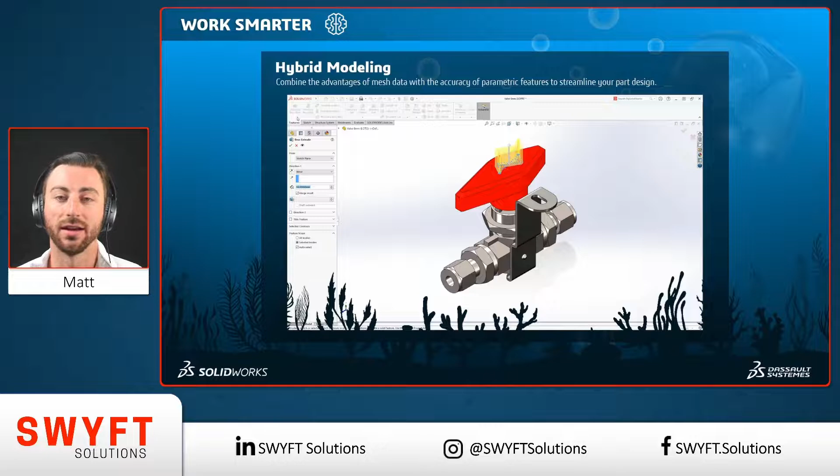Then we're going to jump into some of the newer applications available via the 3DEXPERIENCE Works portfolio that can work directly with SOLIDWORKS to enhance your workflow even further. So let's get started with the on-the-surface look and start with some of the improvements that will help you work smarter. First up, we've got improvements to the hybrid modeling process, allowing you to work with mesh data like you've never had before. Now you're able to actually just use parametric features directly with your mesh data, such as cut extrude, boss extrude, so on and so forth, rather than having to use those Boolean operations.

Next up, we have configuration table, where you're actually able to have a table and see all of the features of your configurations and edit those all at once by suppressing or allowing certain components to be available in those assembly configurations. Next up, we have component patterns, and with component patterns, there's been improved intelligence when it comes to using pattern-driven component patterns, and the seed position will be a lot more accurate.

And we have a complete rehaul to the interface of the GD&T callouts when you're creating your SOLIDWORKS drawings. So you're going to have a much smoother workflow if you're adding GD&T callouts.

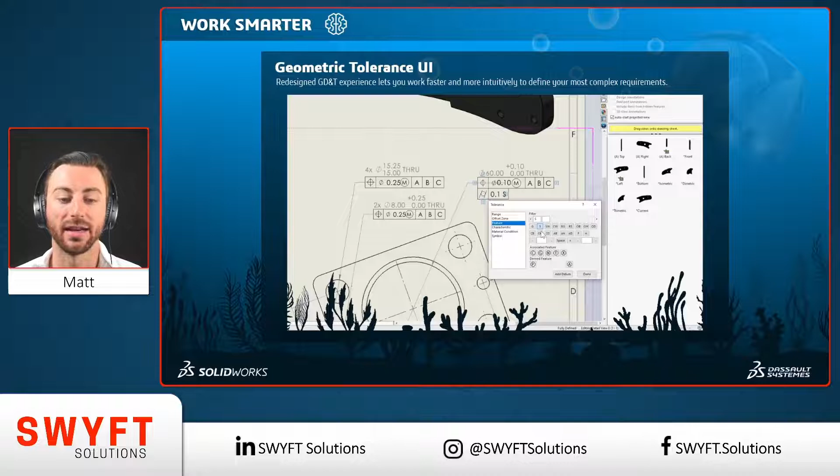We have a completely new stud wizard added in SOLIDWORKS 2022. And with this, you're able to generate external threads to existing geometry. So if you have a boss there, you can add external threads to that geometry, or you can choose a specific point, choose the size of the stud, and it will actually add the boss and the external threads for you. You can add undercuts, and the graphics for the cosmetic threads have been improved. So you're going to have a better looking model while keeping that lightweight performance.

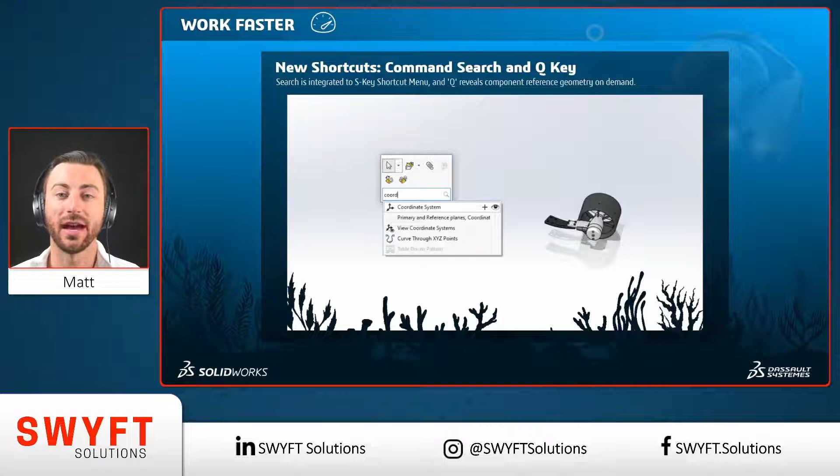Now let's take a look at some of the improvements that will help you work faster. There are some new shortcut commands added in. With your S key, you now have the command search right in there, and that's going to be awesome for so many people. The S key is definitely a fan favorite. And then with the Q key, that's going to allow you to hide and show your reference geometry, such as any reference planes, so on and so forth.

If you've worked with large assemblies and large drawings, you know if everything is always resolved all the time, it can really bog you down. So there's been a lot of improvements over the past few years with large design review mode for large assemblies and detailing mode for drawings with large assemblies or parts. So with this, you can actually go to detailing mode drawing directly from large design review mode without ever having to resolve any of your components, keeping your workflow really nice and quick.

With the similar concept here with the sub-assemblies, you can now directly open up sub-assemblies in large design review mode from the parent assembly that is in large design review mode. Same with a lightweight concept, so you're able to really keep that workflow moving really nice and quickly without having to resolve those components.

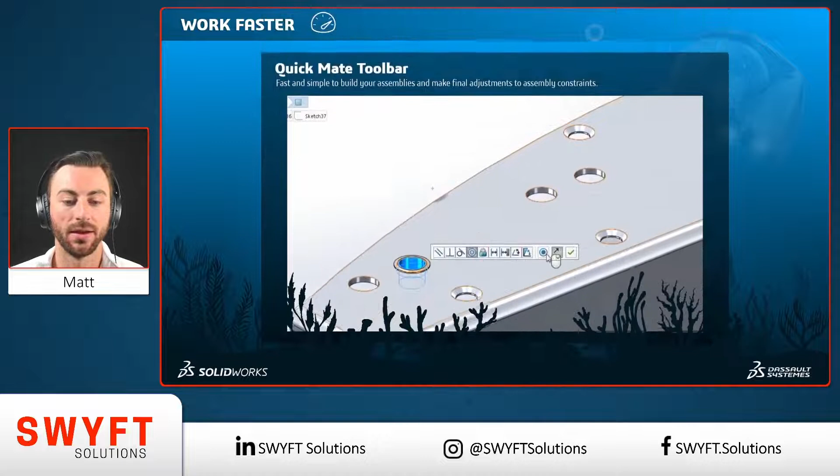The quick mate toolbar has a little bit of a tweak here in which you can actually fine-tune your mates before you confirm the mate. So for concentric mates, you can lock that mate before you confirm it. So on and so forth, and that can be toggled a little bit in your system options on how you want that to function.

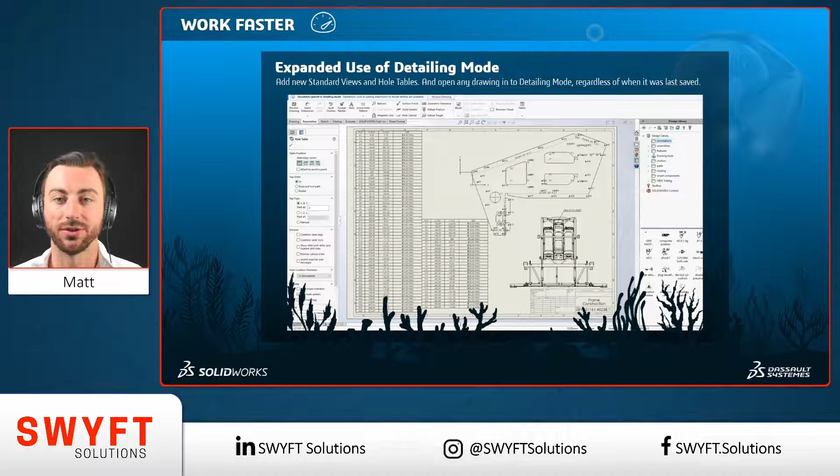The detailing mode has some improvements in which you can now add hole tables without having to resolve any of your components, and even better, you can add some standard views. So you can just go ahead and add your front, side, and top views without ever having to resolve those components and make your workflow much smoother.

And now let's take a look at how SOLIDWORKS 2022 can help you work together. So there's now new options for administrative image types, and this will help you deploy those images remotely more smoothly and allow people to download the installation data directly from SOLIDWORKS rather than having to VPN into your connection and pull it over remotely.

With the 3DEXPERIENCE Works portfolio, if you haven't heard of xShape, that allows you to use cloud-based, in your browser, basically a sculptor type, subdivisional type modeling. It will really enhance your workflow if you work with industrial design type designs, anything with more complex surface geometry.

There is now available out-of-the-box cloud data management powered by ENOVIA tools, and it'll get you up and running with cloud-based data management. So wherever you are, you can be managing your data, and we'll be taking a look at some of these tools in more depth with the workflow towards the end here.

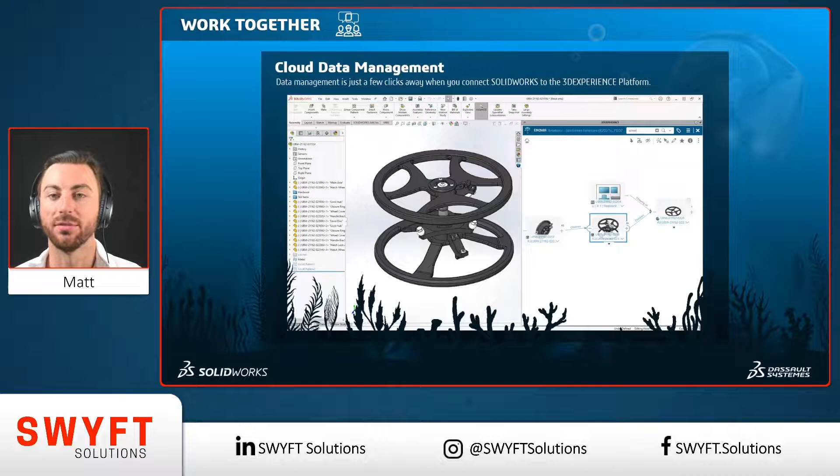We also have introduced compatibility of Simulia-based simulation, which will take you past the capabilities of SOLIDWORKS simulation. So if you're ever hitting any limits with SOLIDWORKS simulation, you now have options to go beyond that.

And there's a new licensing option with SOLIDWORKS, 3DEXPERIENCE SOLIDWORKS, that is directly compatible with that cloud-based data management that I just mentioned, and it comes with out-of-the-box platform connectivity, so you're able to get up and running with that data management without having to worry about setting anything up.

So now let's take a look at some of the features individually based on the different aspects of the SOLIDWORKS 2022 release. So like I mentioned, there's a lot more updates that have been made this year, but we stripped it down to some of the ones that we think would be more applicable to the wider audience. So we'll start out with the user experience. With the user experience, we talked about the command search in the shortcut bar.

With coordinate systems, you can now define their position numerically, and that can be an XYZ coordinate as well as the angle of that coordinate system. We talked about the reference geometry shortcut being now default to the Q key. With the system options, now you have a little information icon next to some of these options that allows you to hover over and get further context on what those settings actually do.

With dismissed messages, if you go into your system options and hover over that dismissed message, you'll now be able to see the full message rather than having just the first little snippet of it. With the notification and message bar style, I'll show you what this looks like here on the next slide, but there's been an update to the graphical appearance of that, so your user interface will be a little bit updated from what you're used to.

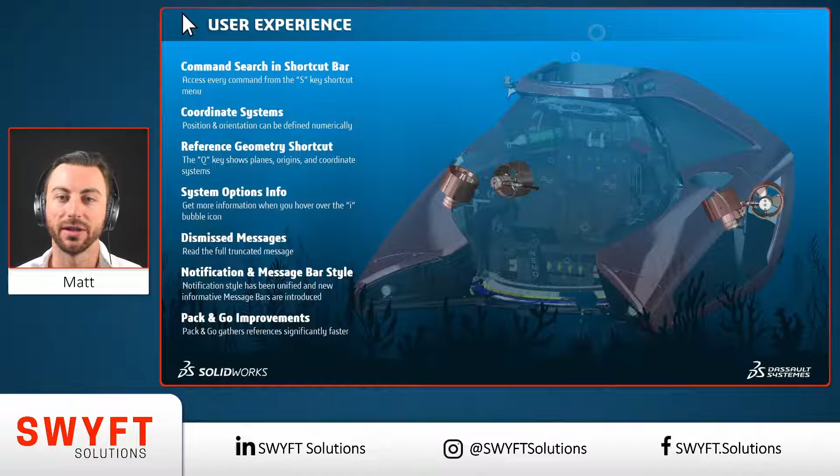So now let's jump into parts and break that into two sections. Start with hybrid modeling. So as we mentioned earlier, hybrid modeling now will allow you to use your parametric features directly with that mesh data. With the hole wizard, you now have the ability to define the size of that slot in the hole wizard dependent on the arc tangents or the arc centers. So that's going to be a really handy improvement.

You can now use bidirectional draft, so you can set that one neutral plane and draft in both directions rather than having to create two different draft features. Pack and go references: if you're using any kind of master modeling where you're breaking apart the different bodies at the end and saving those off as individual parts, pack and go will now recognize this and pull those bodies into the pack and go.

Section plane on an axis: if you've ever tried to section a model or assembly and just tried to guess where the middle of that hole was with your section plane, you don't have to worry about that anymore. You can actually choose the axis of that hole and you can now rotate the section plane about that axis. The stud wizard we talked about, and the configuration properties have now been updated, allowing you to go through and edit properties for multiple configurations a lot more easily.

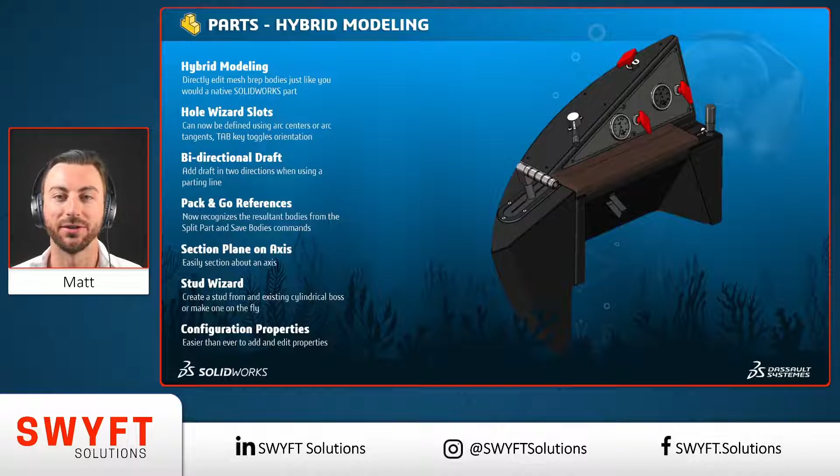So jumping into parts and structure systems, once you add your primary structures, you can now add secondary structures even more quickly. You can choose a single point and add multiple secondary members off of that point. With the connection elements, you can now add things such as brackets between two members. And what's even more cool about that is if it has holes, like a bracket with holes, the holes can automatically be added to the members that it's attaching. So it'll make your workflow really clean.

The gussets and end caps are now available for structure systems as opposed to just for weldments. You can also now mirror across two planes. So as opposed to having to do two different mirror features, you can now do that in one feature. And if you're ever adding any sheet metal flanges to circular edges, you can now directly edit that edge profile.

So jumping into assembly performance, we talked about remaining in large design review mode, and you can now open the detailing mode drawing directly from that large design review mode.

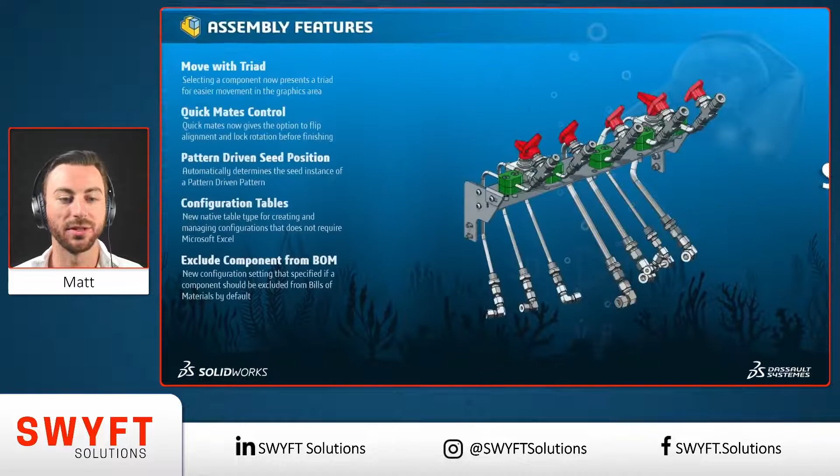Jumping into assembly features. With components in an assembly, sometimes if you're just trying to drag a component around in space, it's a little bit hard to get it accurately, approximately where you want. You can now drag those components with the triad, allowing you to move it in an X, Y, Z direction or rotate it about those planes.

Quick Mates control, we talked about the update to that Quick Mates toolbar. We talked about the pattern-driven seed position intelligence being improved. We talked about the configuration tables.

And now with the configuration settings, there's a new setting that allows you to automatically exclude that from a BOM. So if you have a configuration of a part that you automatically want to be excluded from the BOM, that is now in the configuration settings. Every assembly you now add it to, it will automatically be excluded, and then you can go in and turn it on if you want.

And then this is just there a little, as I mentioned earlier, there's a little bit of configuration you can do with that Quick Mate alignment setting, so you can choose how you want that to appear in your interface.

Jumping into the drawings. There's been a decent amount of drawing updates here. So with detailing mode, we talked about how you can add your standard views and hole tables, and you can open any year's drawings without having those reference parts. That'll allow you, if you have an orphan drawing, to open it up and see what's contained in the drawing without having those parts.

The circular dimension, if you're adding a circular dimension, you can now quickly toggle between whether you want it to be a radius, a diameter, a linear, within context, so on and so forth, and you can just use tab to choose it before you place it.

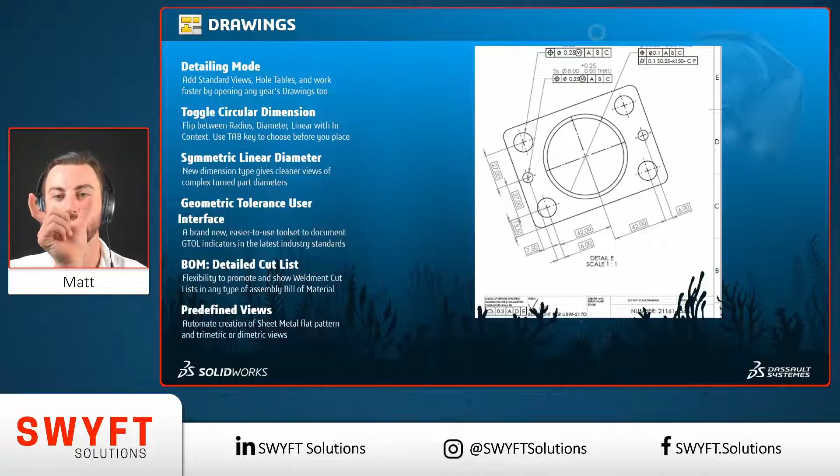You now have a symmetric linear diameter, so instead of having the two lines on the opposite side of a diameter that go up with the dimension in between or off to the side, you can now just have that diameter come up one side off the circle and have the diameter symbol. That'll clean up your drawings quite significantly if you have a really complex drawing.

We talked about the GD&T interface being completely revamped.

With the BOMs, you can now actually go ahead and add, if you have multiple weldments in an assembly, all those together into a single assembly BOM.

Predefined views, there's been some updates to that allow you to add a sheet metal flat pattern view and trimetric or dimetric views. So if you have those templates with those predefined views set up, you can now have a flat pattern associated with that as well. And you can even control whether or not you want to see the bend lines on that.

So with detailing mode, before this new release, it was a system option whether you wanted to save the detailing mode data with your parts. That would increase your file size, and you didn't get the option to choose for just your large assemblies whether you wanted to save that or not. So now it's a document property. You can go in on a drawing to drawing basis and choose whether you want that data saved. So now your drawings and assemblies, you can keep your file sizes lower by choosing to only save this for your larger assemblies.

With the detailing mode, the save time has also been improved. There have been tests run on various different types of drawings, and as you can see here, A through F, each version of drawing was improved regardless of the test run, from SOLIDWORKS 2021 to SOLIDWORKS 2022.

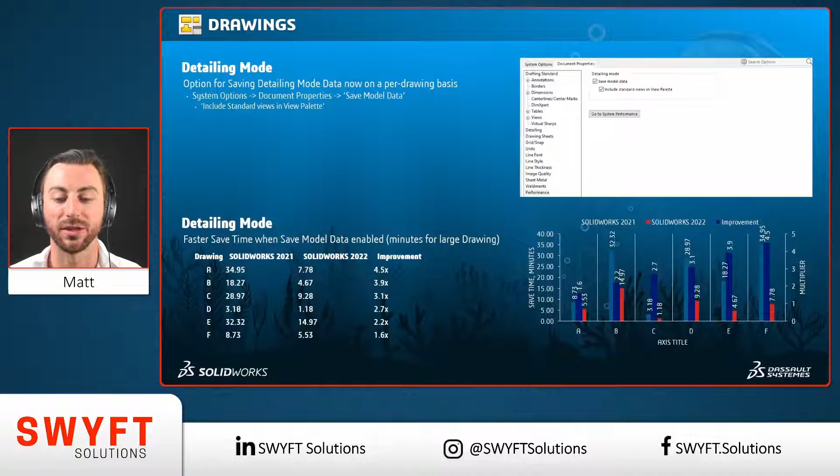There have been some improvements with the IFC aspect of SOLIDWORKS. So if you're working with plant floor layouts, you're getting IFC files or exporting them. First up, if you're exporting them off, the quality has increased, so anybody you're delivering these files to will have improved quality. And then the import has also been updated to allow you to choose which objects you want to import, which can speed up your workflow—instead of having to import all objects within an IFC, you can choose which objects you want.

The DXF and DWG output, you can now choose to save that with colors, which could be really handy in your manufacturing process if you color code certain objects on your DXFs and DWGs. And the import performance in general has just been updated, so now if you're working with parts with a large number of faces or bodies, your import will be much quicker.

There have been updates to graphics with the aspect of lightweight graphics. Traditionally, if you opened up something with graphics applied and it's in lightweight mode, you wouldn't necessarily see those updated graphics. Now it will automatically recognize if new graphics have been applied and resolve that for you, so you're always seeing up-to-date graphics.

The cosmetic thread feature has now been updated to a more realistic appearance, allowing you to keep that lightweight feature but have a better appearance in your model.

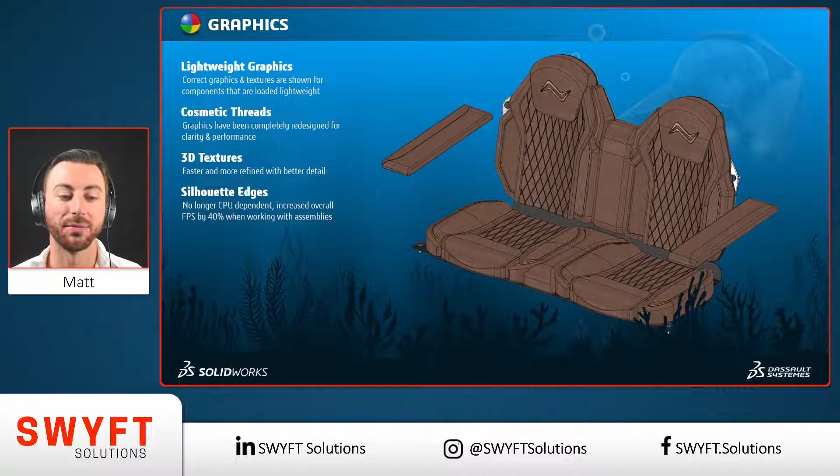This one's pretty quick. In administration, we have the introduction of a couple new administrative image types. The first is the remote option I discussed earlier, which allows your remote users to install files from the SOLIDWORKS download site instead of pulling them from your servers. The other option is a compressed administrative image, which makes it easier to copy since all the files are compressed.

There's also an update that allows you to nest groups. So if you have certain SOLIDWORKS settings you like to apply and deploy to certain groups, such as an engineering group or a designer group that need different programs installed, you can nest those groups and define those settings per group.

Next up, in Visualize we have a whole new feature that allows you to match the camera perspective. You're able to define and use the XYZ vanishing points and get the perspective of the camera just right for applying it to a 2D background.

You can also render only shadows, so you can add plane geometry such as a plane surface or a cube, have the shadow render up against that surface, and then have the actual surface itself not be visible in the render.

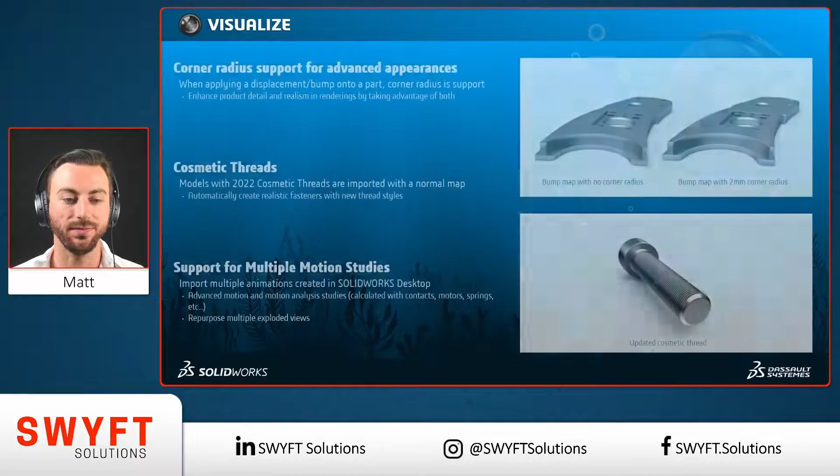With the corner radius feature, it allows you to apply a default small corner radius to any sharp edges, since realistically there is no truly perfectly sharp edge in this world. This adds that much more realism, which can make or break your renderings.

Before, you could only choose to have your bump map or the default radius applied, not both. Now you can choose to have both the bump map and the corner radius.

The cosmetic threads, now improved in the SOLIDWORKS interface, automatically come over into SOLIDWORKS Visualize, giving you increased realism there as well. We also now have support for multiple motion studies, so if you're setting up explode animations or motion studies in SOLIDWORKS, you can bring all of those over into animations in SOLIDWORKS Visualize.

When it comes to routing in SOLIDWORKS 2022, you can now create CPoints directly in the SOLIDWORKS interface without having to launch the routing library manager. That'll keep you that much more streamlined in your process.

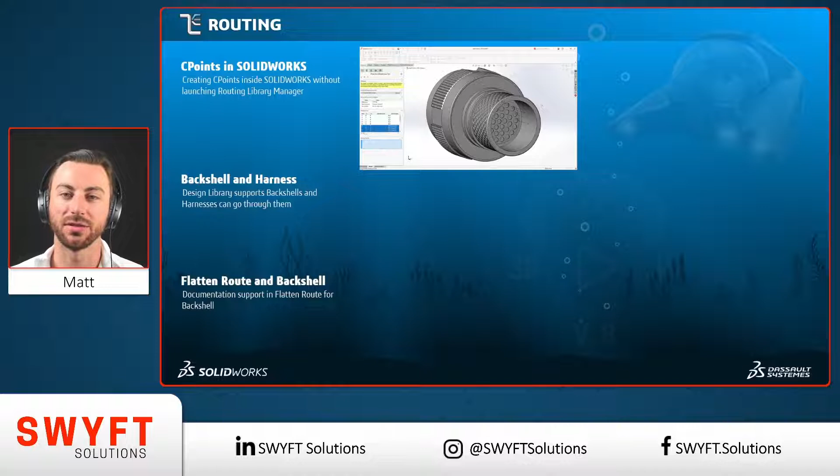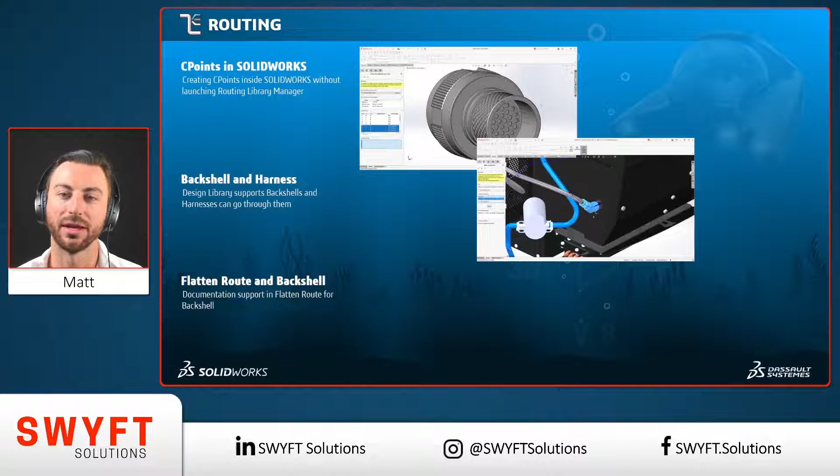There's also now support for backshells, so you can have the backshell inserted into your route and the harness go right through it, making sure your wire isn't going to have any crimping. The flattened route also supports that backshell integration.

CPoints are also available to create directly in the SOLIDWORKS interface without having to open up your routing library manager. And there's been increased performance with the bend radius during route creation, giving a little bit more realistic routing performance.

There's also been improvements when it comes to external connectors. With the flattened drawing aspect of external connectors, you're able to have connection and connector tables, so you can better document all of those external connectors in your flattened views in your SOLIDWORKS drawings. You also have a little bit more control when editing those flattened routes, with on-screen manipulators and flyout menus as you're editing.

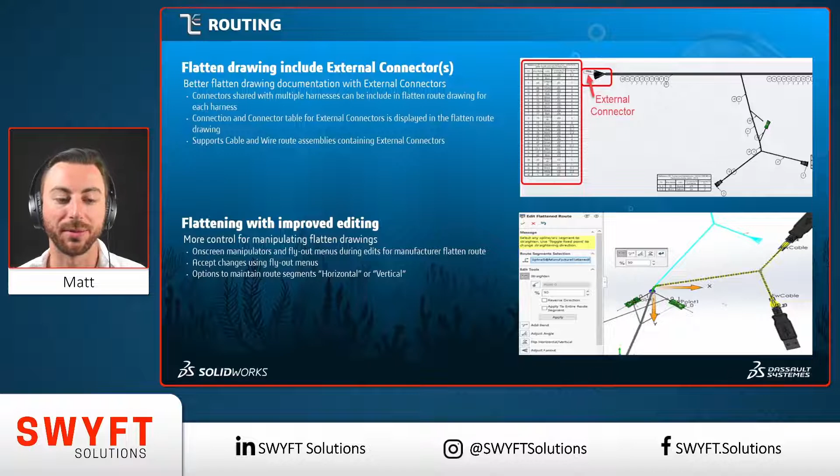Last up, we have improvements to simulation. We have a whole new virtual connector, the linkage rod. You're able to choose from various different cross sections, apply different materials and dimensions to those cross sections, and it'll allow you to solve for shear, axial, and bending loads.

You now have a default mesh of the blended curvature-based mesher, which gives a nice balance between speed and accuracy. It also gives you more control than previously allowed, letting you coarsen or refine the mesh outside of the global range.

And just in general, there has been improved performance, with solve times being reduced up to 30% with SOLIDWORKS Simulation 2022.

With the frequency, buckling, and nonlinear simulation types, you now have an automatic solver selection, making it that much more accessible to those who are not simulation experts.

And last but not least, you have beam shear factor calculation improvements that now consider the beam's material and section shape.

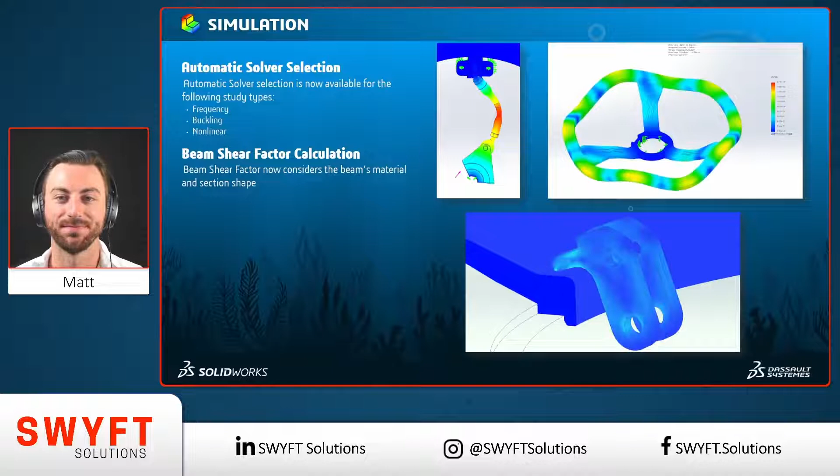So that's it for the deeper dive. As I mentioned, there's a lot more improvements, but we had to condense this down because we're trying to keep it to a relatively short time here.

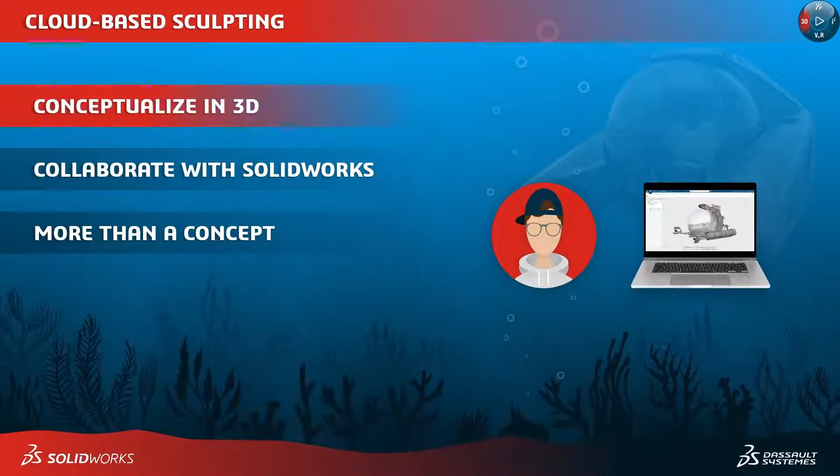Let's start with conceptualizing it in 3D, jumping in with Dan here in the 3D Sculptor role on 3DEXPERIENCE. This is in a web browser, so you can use it even on a touchscreen device, tablets, anywhere you have an internet connection and a web browser.

We have the internals of the Nemo submersible here, and we can see that this is a SOLIDWORKS component, but we can build around that existing SOLIDWORKS geometry. We can see all of the individual components associated with it, and we also have some reference sketches available here that we'll show as well.

Next up, we have the option to insert a primitive, which is basically a virtual hunk of clay, and you can choose an approximate shape you'd like to start with. We'll go ahead and add a box here.

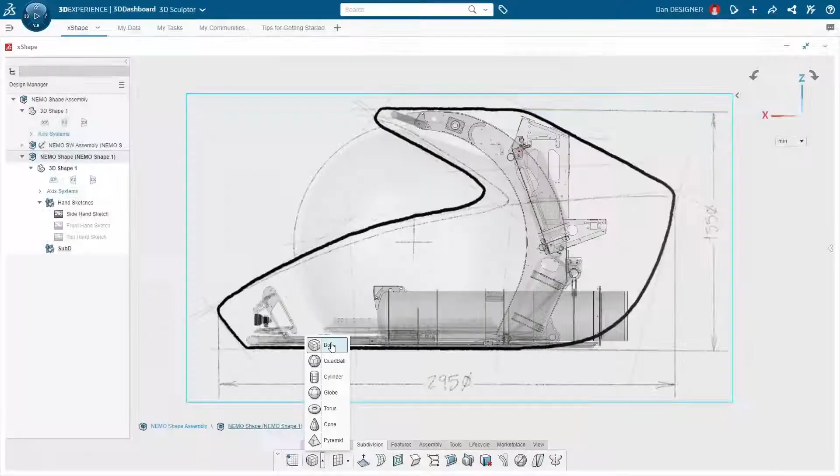Once we add the box, we can see there are a number of lines across this, which is why it's called subdivisional modeling—it takes your geometry and divides it into multiple different surfaces. You can choose the refinement as you're entering it, for how refined you want that mesh to begin with. Generally, the fewer subdivisions you have to begin with, the better, and you can always add more detail later.

The manipulator itself is called the robot, and we're able to move that, which controls how the geometry is being affected. In our case, we want to scale this back. Now that this is on the left edge, it will scale from the center point of that robot, and we'll scale this backwards.

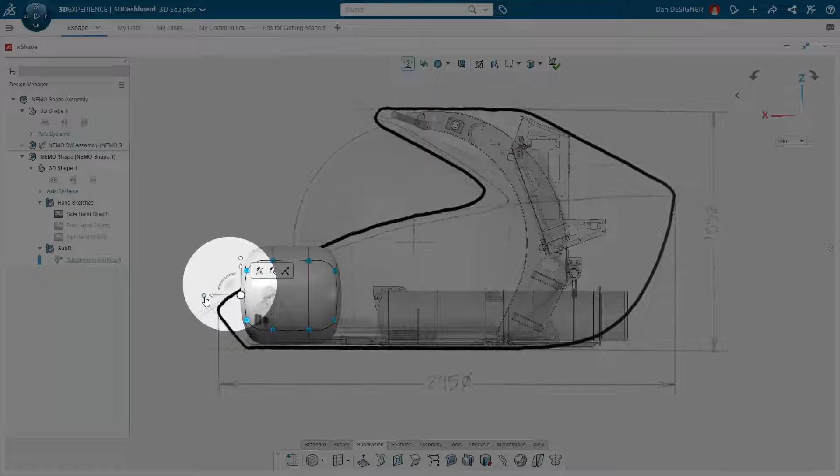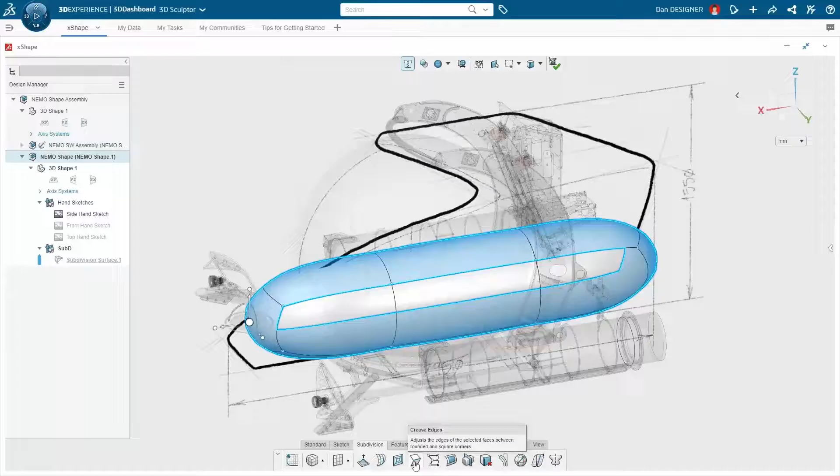As a default, all of the geometry is a C2 surface continuity. We can use some intelligence here when selecting face loops and face edges, and actually crease edges to make them a sharp edge as opposed to that C2 level surface continuity. You can use the slider to control how sharp that crease is, or add filleted edges to that sharp edge to soften it just a little bit.

You can see here that the edges themselves have a color context showing those edges are now filleted creased edges. When working with touchscreens especially, or if you're good with a mouse, you can draw a nice smooth curve that you want all of your vertices to align to, to get a really quick update on your geometry.

You can then start tweaking using the robot manipulator, and we'll go ahead and move this geometry into place on one of the sides here of the Nemo submersible shell and start tweaking it further.

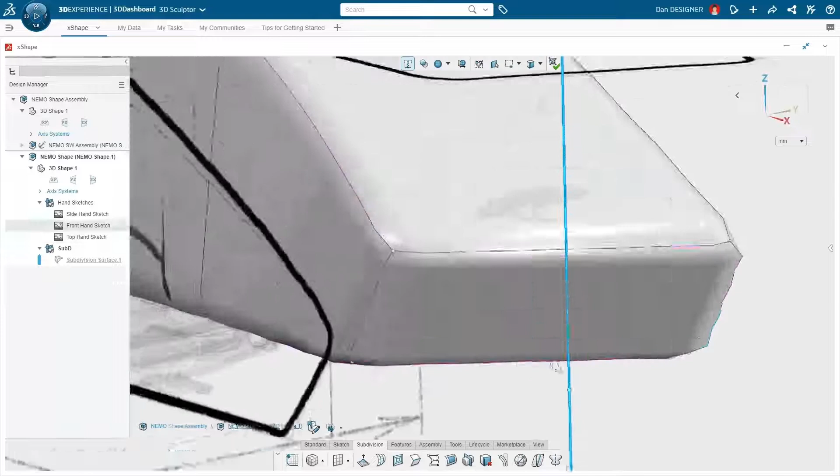Now you can actually move the robot and attach it to different lines as well, which will allow you to have the axes of this robot along that line's orientation. So now you can just shift the points along that line, and you can use the ruler here to get a more precise adjustment as you're tweaking your positions.

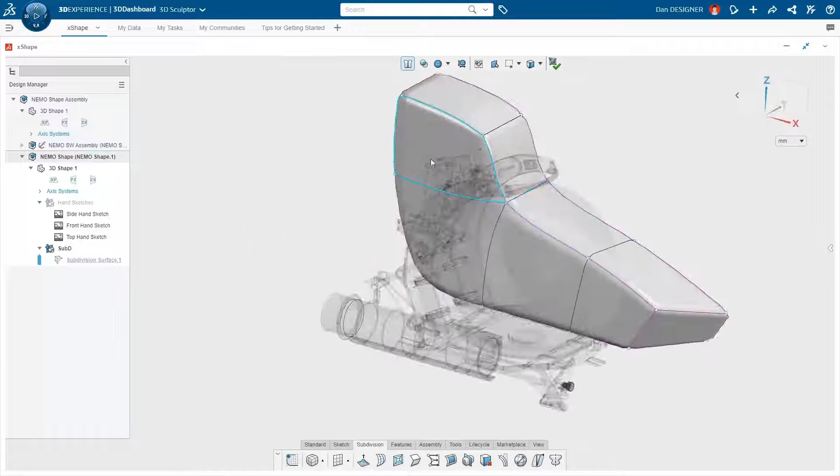So now, once you have your base geometry, as I said, you can add more face loops, edge loops for more control. However, if you want more geometry, you can also extrude geometry, which basically adds another virtual hunk of clay, and then we can start shifting this over.

We're going to drag this over the center plane because we're going to add symmetry. You can choose a plane for symmetry, and this will be a dynamic symmetry, so that as we're changing things on one side, you'll see it update on the other side, even after symmetry has been applied. Then you can turn that off whenever you're ready to stop that symmetry condition.

Now we want to have this be a flat top on the Nemo submersible, so we can align all these entities by a line and make sure that line is horizontal. Then we'll go ahead and scale this in to follow the front profile here.

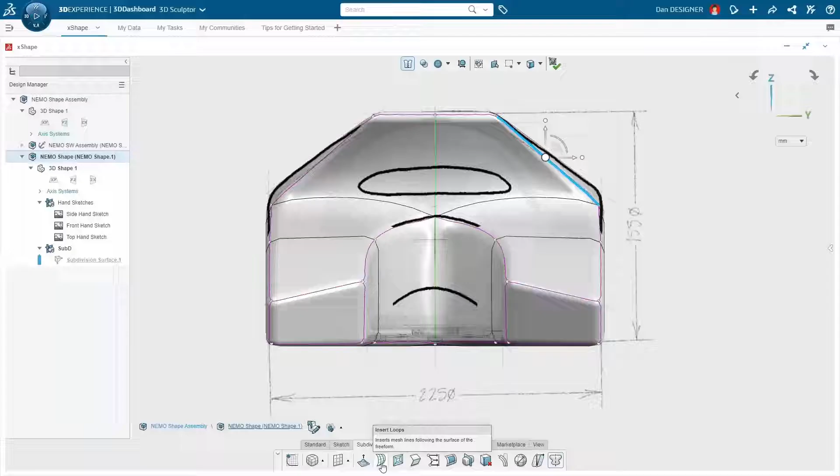As I mentioned, we can insert more loops later, and that's what we're going to do here. We want that cutout through the back of it, so we want some loops around that we can control, as well as add a little bit more control to the design itself.

We'll go ahead and tweak this a bit further to get that little swoop on the front top edge. Then we'll add some edge loops in vertical orientation as well, to give us control around the cutout, as well as the ability to add this swoop at the bottom.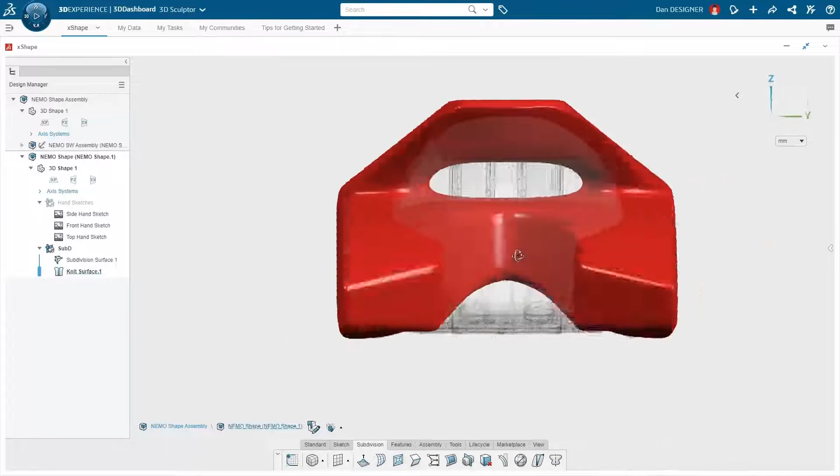Now we're going to go ahead and select edges on opposite sides here, and we're going to use the extrude command again. What happens when you have edges or faces on the opposite side selected is it will actually cut extrude through the geometry. And since we have the symmetry condition on, we now have that cut through both sides and a nice cut through the back.

So jumping into SOLIDWORKS, we're able to actually pull this geometry into SOLIDWORKS. But first, we're going to go ahead and add some new components in SOLIDWORKS. This is actually the 3DEXPERIENCE data management add-in. We'll be diving into this next. But just a quick view, you're able to see all of your components, your feature tree here, and reserve components. This prevents anybody from your team from saving over you as you're working on it.

And then we'll go ahead and search our library of components and add the thrusters as well as the top hatch. So once that's added in, you can go ahead back to your data management add-in and save that to your cloud storage. Now everyone has access to the most recent version, and they can update it in their session and start making tweaks to it as well.

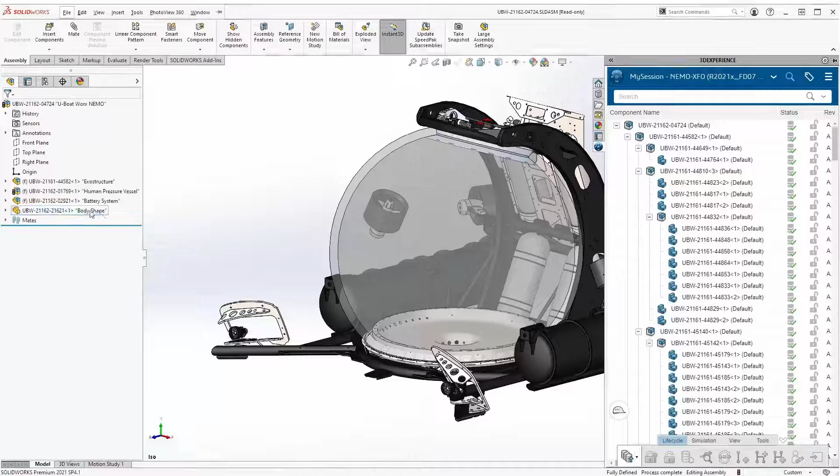So in addition to the thrusters and the top hatch there, we're going to want to add that shell that was just created in xShape. And you can just search it just like we did with the other components and add it right into your SOLIDWORKS assembly. Once that's made it into place, we can go ahead and make that a little bit transparent to see how it fits around everything.

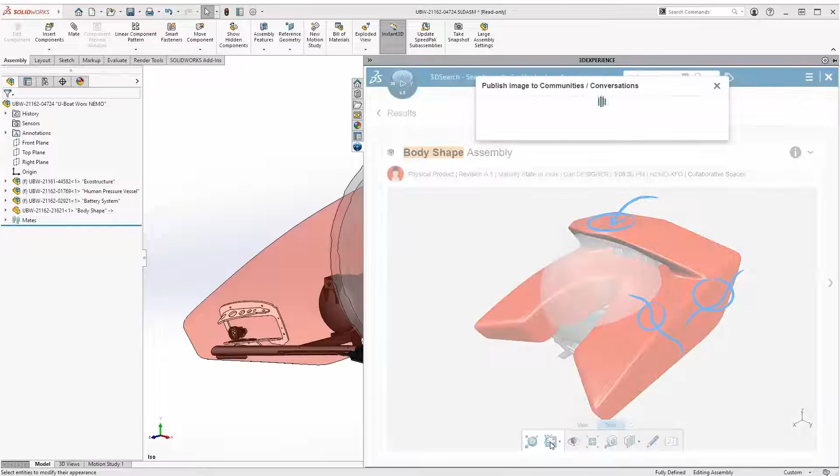Now, we're able to take this and actually apply downstream features in SOLIDWORKS, such as shelling it out, adding cuts and everything. But we want to add a couple notes so that we can jump back into xShape and make any updates. In our case, we want to have holes for those thrusters, and we want to have the geometry aligned to that top hatch as well. Before we do that, we do add a couple of, as I mentioned, downstream features. So we shell this out a little bit and add some cuts.

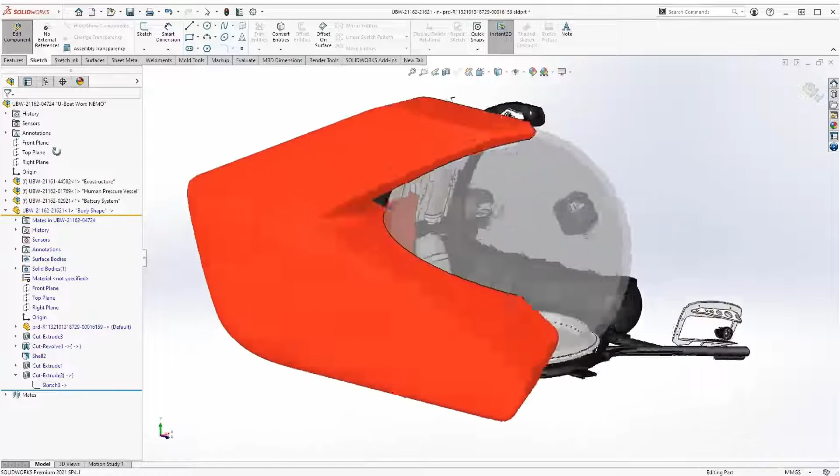So jumping back into the xShape environment, we've now taken the geometry, created it conceptually in xShape, brought it into SOLIDWORKS, added some refinement notes and downstream features in SOLIDWORKS, and now we'll jump back into xShape.

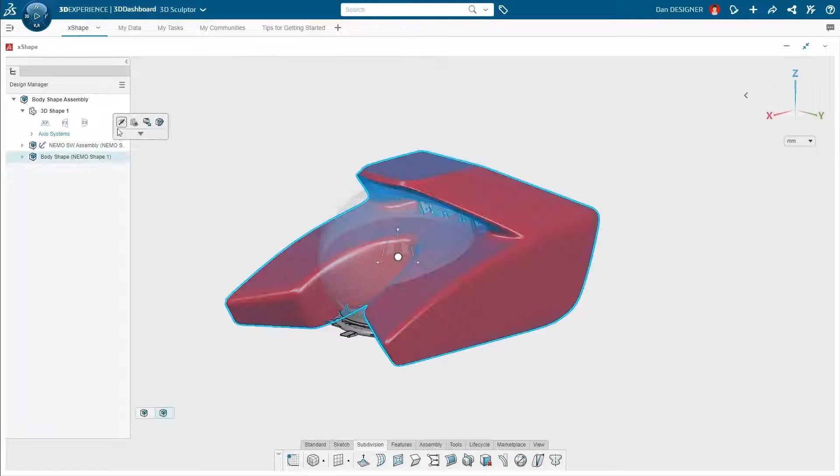So from the 3DEXPERIENCE platform right in your browser, we get a notification that there's been a post made and been tagged in a comment here, and we can see the image that was just created with the markups. Give feedback that we're going to jump on that update and refresh the session. And what that will do is it will pull in those updates that were just made in SOLIDWORKS, because those were saved to your cloud storage. So now we can see all of those thrusters and hatch components added into this assembly. So now we can design in context around those properly.

So we'll jump back into the subdivision model here, and we'll add a geometrical set which will allow us to kind of organize our feature tree here. And we're going to actually convert the entities on this top hatch so we know exactly where we're going to have to align that geometry to around that top hatch.

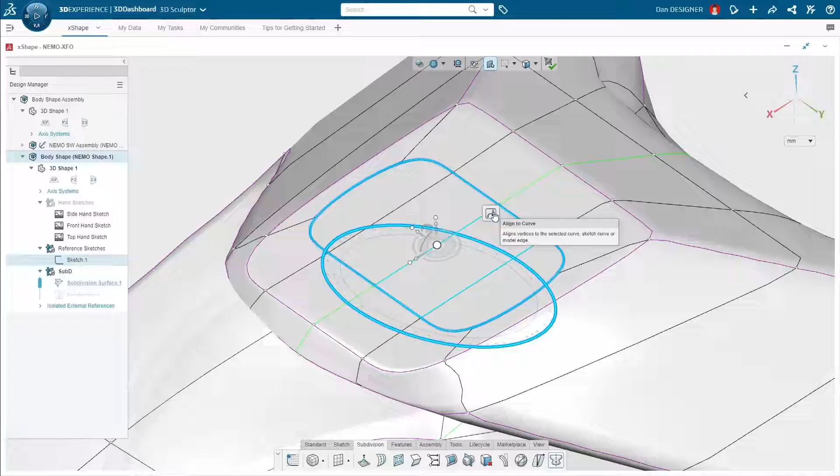So jumping back into the subdivision model, instead of adding loops all the time to increase the control you have, you can also subdivide the faces further to give you a little bit more control. In our case, we want to crease the edges around this because we're going to align this geometry to the top hatch. We'll select that loop there and also select the loop that we converted from the entities of the top hatch and align to curve. And that will just pull that geometry directly around that converted entity that we had.

Now in the background, this is all C2 level surface continuity, but if we show the cage itself, we can see a little bit more of what's happening in the background here. In our case, we want that front edge to be all aligned with each other in a nice straight line, so we can go ahead and select all of these vertices and use the align to line, or align the vertices to each other in a line. So now we have that nice straight front edge.

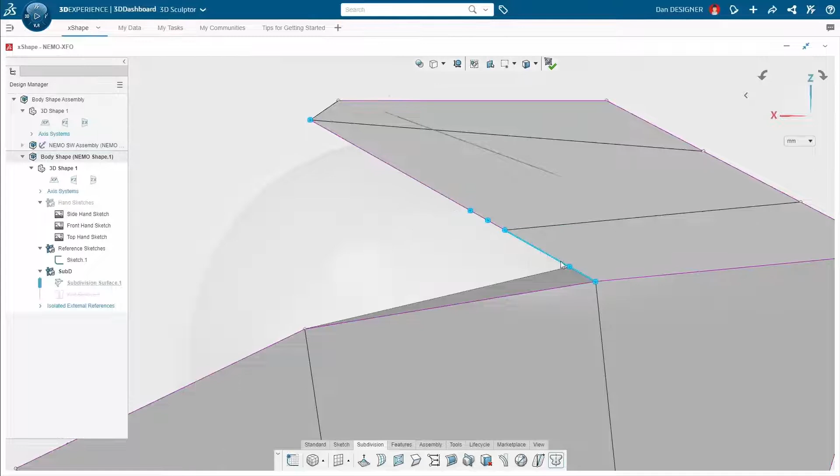We can also do that with faces, similar to how SOLIDWORKS mates work. You can actually select a number of faces and have those coincident to each other, and that creates a nice flat planar surface. So now we can go in and start tweaking this a little bit further to give the orientation that we want. We can move that robot down so that as we rotate it, it rotates about that point now, and we can rotate this whole face up a little bit.

And we can do the same thing by applying the robot along a face. And now as we're dragging along that face, everything is moving along that plane, and we're not losing that coincident relationship. And we'll go ahead and make a few final tweaks here with the geometry itself.

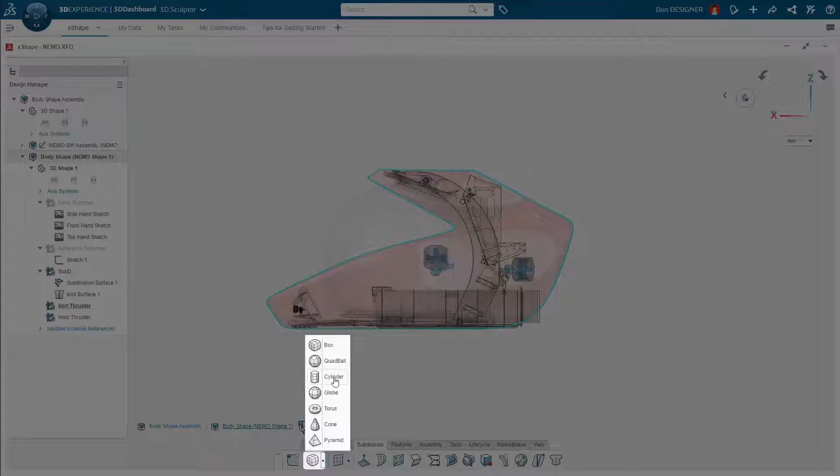So next up, we're going to make the cutouts for the thrusters themselves. So we'll add a couple more geometrical sets. And what we're going to do is a Boolean operation in which we create geometry where we want the cuts to be and subtract that geometry out. So we'll go ahead and add a cylinder in and start positioning that around the vertical thruster where that pathway of the water will be flowing.

And we'll jump ahead here. We created the horizontal thruster as well. That's in a different geometrical set. And we'll go ahead and use the traditional SOLIDWORKS workflow of a combine command, which will allow you to subtract that geometry from the base geometry of the shell.

So now we see we have those nice lofty cuts that would be really difficult to achieve in parametric modeling, especially when it comes to updating that geometry. It becomes even more complex. In our case, we want this cutout to flow a little bit closer to the bottom of the horizontal thruster cutout. So we're going to go ahead and tweak that.

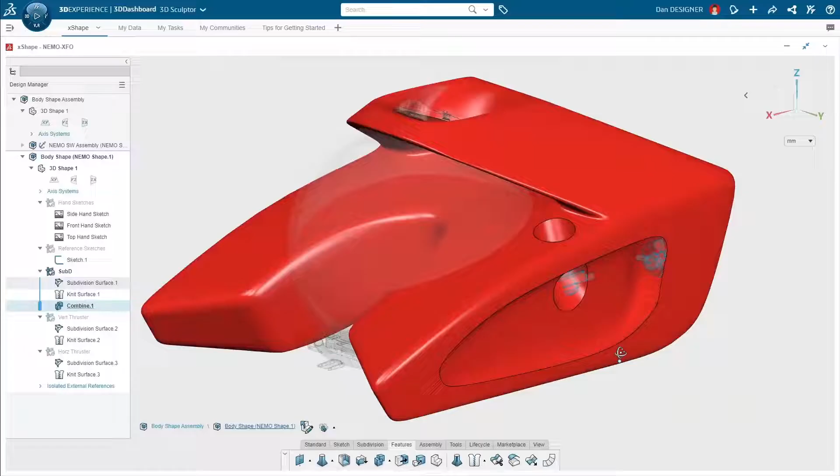And what we can do is we can just jump back into that subdivision model for this vertical thruster. And even though that was created before the horizontal thruster, since the use of geometrical sets, we're able to still see that horizontal thruster in the background, so we can get a good idea of where this is actually going to fall once we complete the command. So now that we've made that adjustment, we can go ahead and confirm, and we can see that that cut is now a little bit further down, just like we want it.

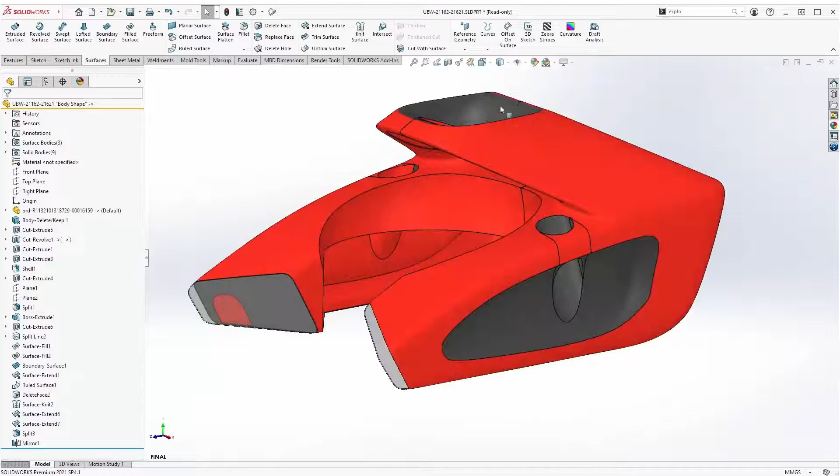So we'll go ahead and jump right back into SOLIDWORKS. And when you open this up in SOLIDWORKS, those downstream features will update and all the geometry will update as well. And we can see here that we used a little bit of a master modeling technique where we broke it out into individual components. And you can now save those off as individual parts, add downstream features even further.

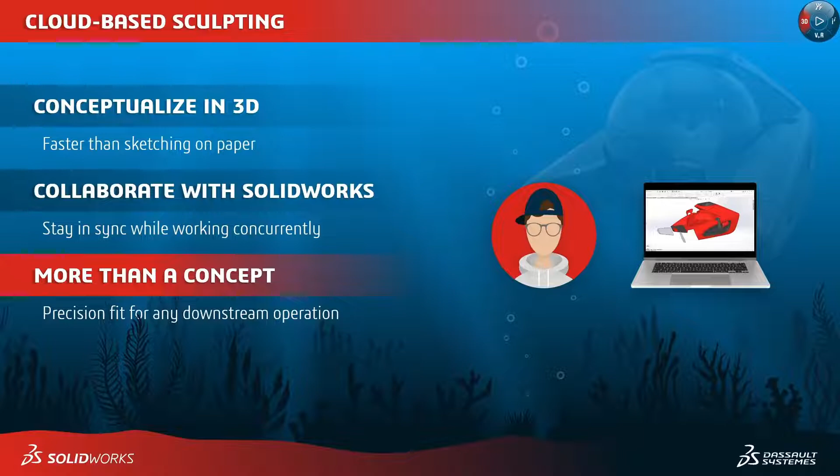So you can actually take this from a conceptualization in 3D, you can collaborate with SOLIDWORKS users, and you can even make it a final production concept with 3D Sculptor role on 3DEXPERIENCE. So it's a really cool technology that wasn't available before for SOLIDWORKS users. So now you can expand your SOLIDWORKS workflow by including 3D Sculptor and creating components that weren't possible before.

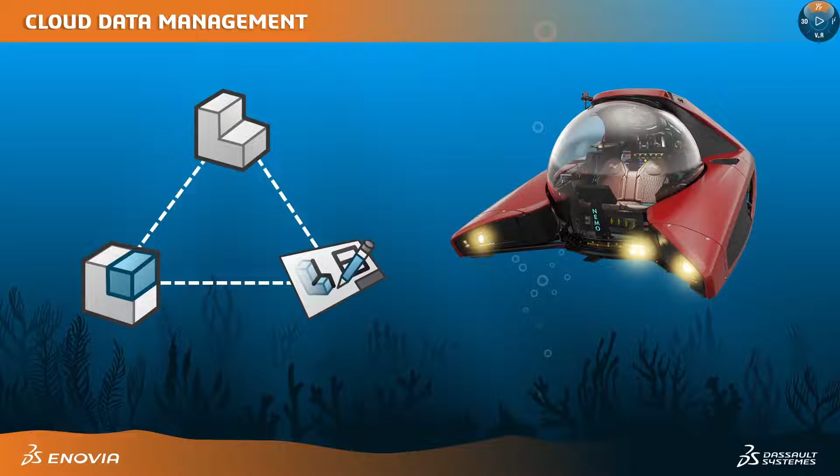All right, so now that we've taken a look at some cloud-based sculpting, let's take a look at some cloud data management. The cloud data management tools available with 3DEXPERIENCE are powered by ENOVIA. And when it comes to managing your SOLIDWORKS data, that can be really difficult because all of the parts and assemblies and drawings generally reference each other. And so generic consumer cloud storage apps such as Dropbox just don't understand these references and can be really tricky to work with others as well.

And then when it comes to setting up traditional systems like SOLIDWORKS PDM, it can be really expensive up front because you have to worry about server management and the infrastructure, and you have to worry ongoing about keeping that server updated. Now, another option is connecting the 3DEXPERIENCE platform to your SOLIDWORKS. So this will allow you to have out-of-the-box cloud data management functionality with ENOVIA-powered tools.

So let's take a look at Eric the engineer and Debbie the designer as they work on finishing up the hatch design for the Nemo submersible, and we'll take a look at how we can store data, manage changes, and design concurrently using the data management tools available with 3DEXPERIENCE.

So starting out with Eric the engineer, we'll jump in as he is wrapping up some changes on the main assembly of the hatch and adding in some toolbox components. Once we add in these toolbox components, we can go ahead and also open up the drawing for the hatch assembly and make sure that those changes are appearing in the drawing.

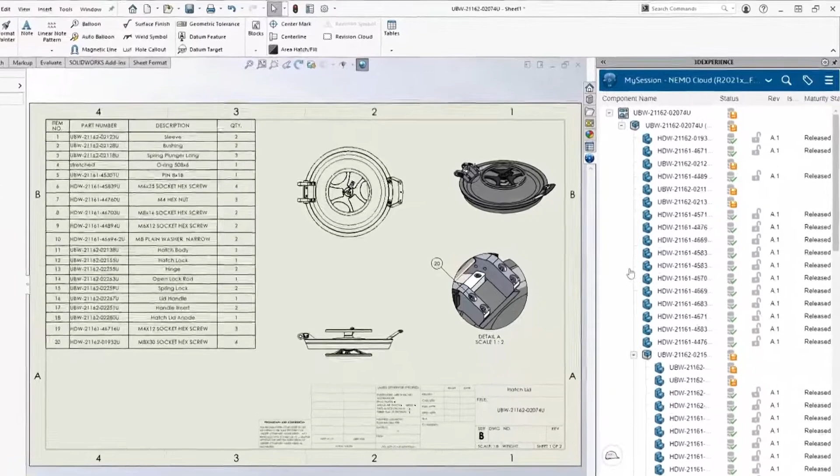Now we can open up the 3DEXPERIENCE add-in here, and this is actually where we can access all of our cloud-based data management tools, and we can actually see the context of whether they've been saved or they need to be saved up to your cloud storage. As for the toolbox components, those are automatically saved up to your cloud storage and set to a release state, meaning that you don't have to worry about anybody accidentally making changes to your shared database of toolbox components.

Once we go ahead and move forward with saving the drawing, we'll open up the Save dialog window where we can see all the reference components that need saving as well. We can also choose a bookmark, and this would be similar to choosing a folder in a traditional Windows File Explorer system. Once we save, it will only save the ones that have had changes made to them. So this makes efficient use of your bandwidth. Now we can see the updated status of all those components are properly saved to your cloud storage.

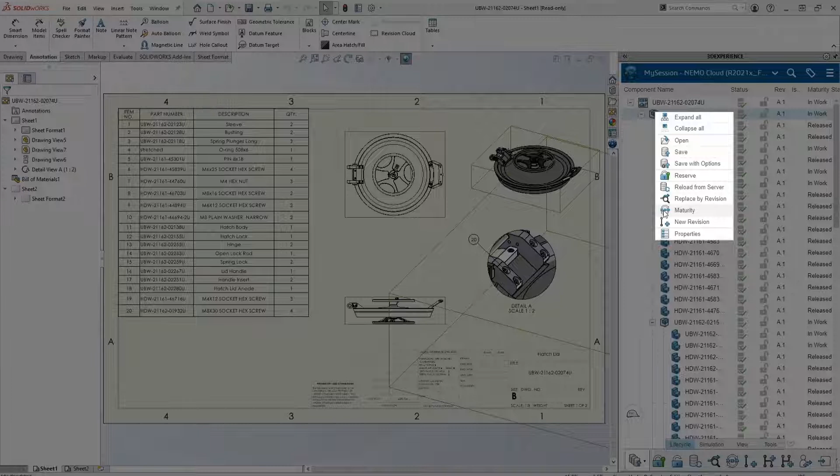Now that this design has been completed, Eric has approved this for production, and we can go ahead and open up our maturity graph right within this add-in pane as well. Choose to include all structural objects and related components, and release all of the components to be released for production. And we can jump in and release these drawings that we had saved to our bookmark as well. And once we release that, now no changes can be made to it until a new revision is created, locking any accidental changes from happening.

We can also add non-SOLIDWORKS documentation as well, such as PDFs. And once you add these, they will also be revision controlled. And you can even preview these components right within this add-in pane.

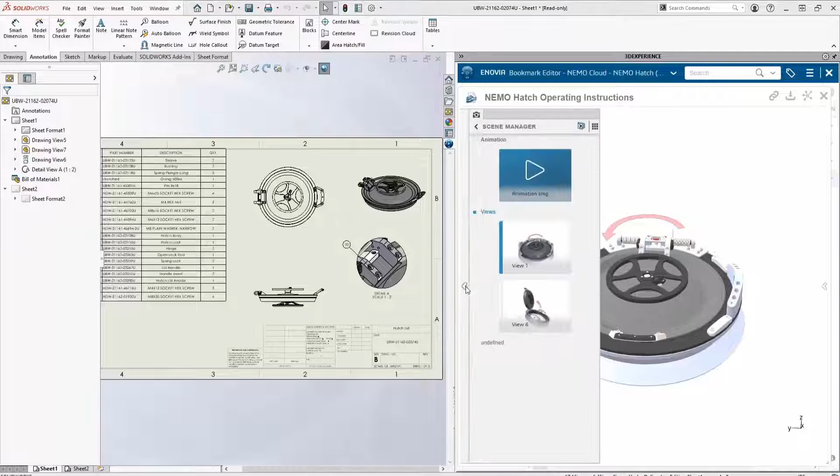So to wrap up, Eric has some sub-assemblies that were not originally added to your cloud storage. So we're going to go ahead and add these folder structures of different components and do a batch upload rather than uploading them and importing them one at a time. And that makes quick use of importing projects that weren't originally created with your cloud storage. So that provides even further out-of-the-box functionality to get people up and running quickly.

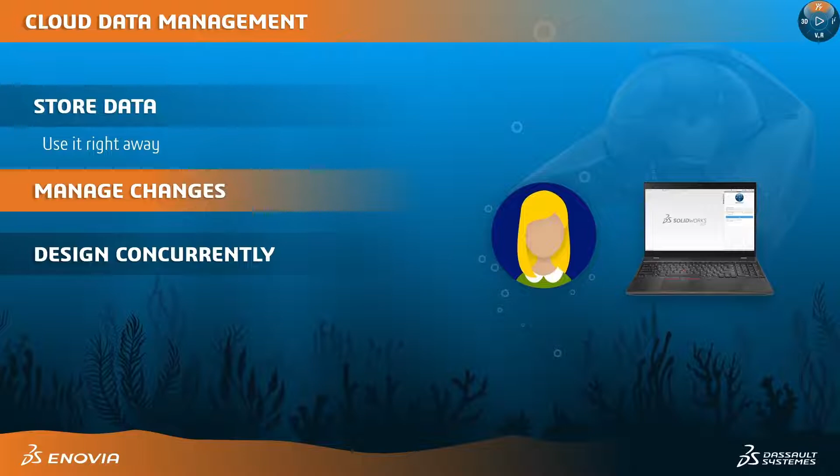Now, taking a look at Debbie the designer and managing some changes. We'll go ahead and sign in to our cloud data management tools, and we'll get a chat here from Eric that the hand wheel needs some updates. So we'll search all of our data, and we see there's a couple different components, so we can actually preview that right here and make sure that we're looking at the right component. And we can also jump into the comments, see that we want to go forward with the design inspired by a racing wheel. So we'll give some confirmation.

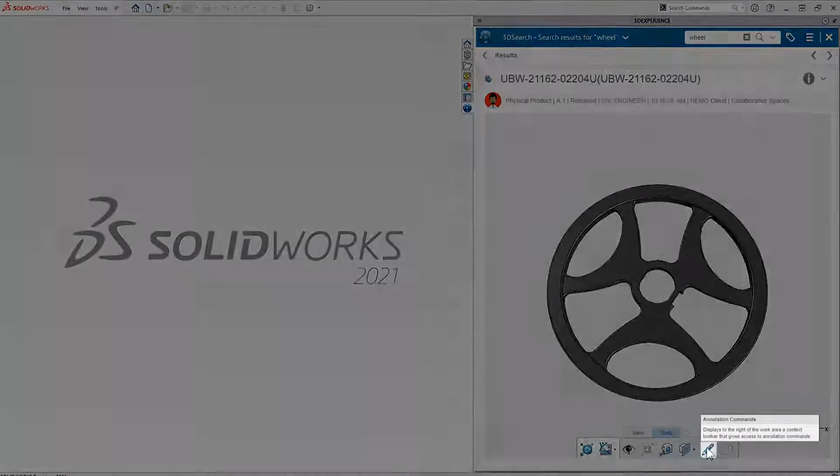We're going to jump in on that, and then we can actually add some annotations directly within this preview to kind of brainstorm on how we're going to go about these updates. So we're going to remove some material from the side, and then with the remaining structure, we're going to give it a little bit more of a swoopy feel here. Now we can go ahead and directly open it.

And last thing we want to do here before getting started on those updates is see how it's going to affect anything upstream or downstream. So we can jump into the relations and see any parents that are associated with this. In this case, we see that it's part of the subassembly, which is then part of the main assembly for the hatch, which has its associated drawing as well. But we want to open up the subassembly as well because it was released data, and to make any changes to it, we will need to create a new revision.

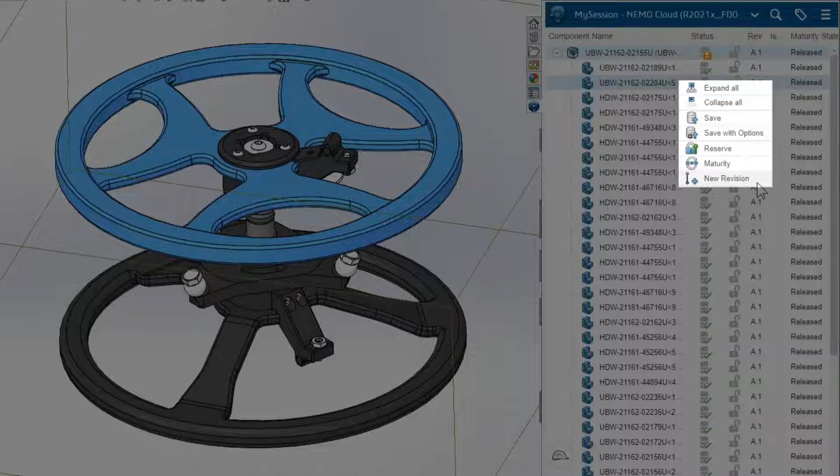So we'll select the two components, the subassembly and the individual component that we want to update, and we're going to create a new revision. Once a new revision is created, you'll see that it still says revision A there, but we have context that it's not the latest revision. So we can replace the current revision with the latest revision in our session, and we now see that we have revision B for the subassembly and the component that we want to make updates to.

So we can go ahead and reserve these components, and by reserving it, now we know that nobody can actually save over anything while you're working on it. Now that the change has been made, we can go ahead and open up the drawing. And by opening up the drawing, we can see that the geometry is updated on the drawing. We can add any new annotations that we need to, and also save those changes up as well.

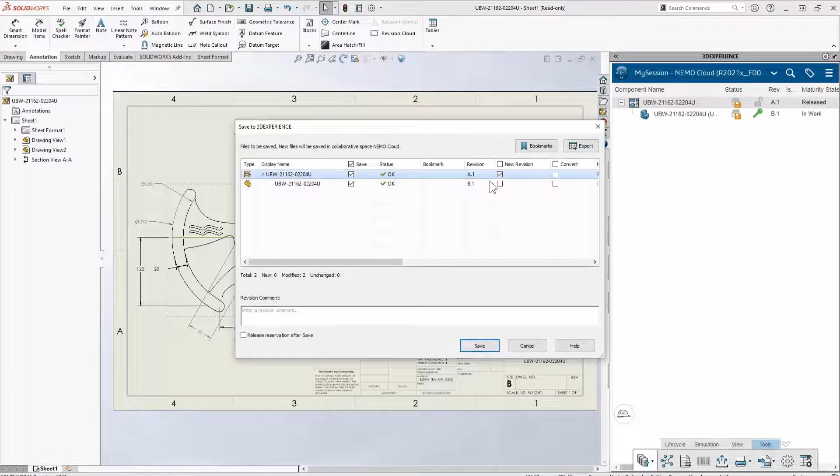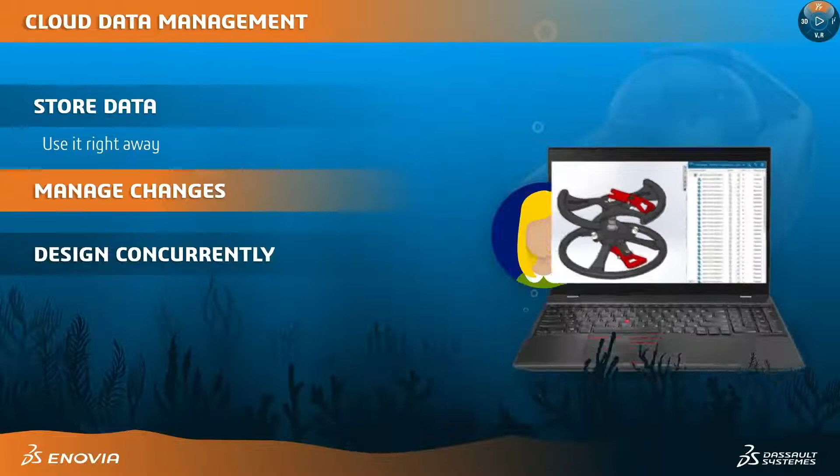We can also create a new revision directly from the Save dialog window if it hasn't been created prior to making the changes. So we'll go ahead and set these to a frozen state, and by setting it to a frozen state, we're making sure that nobody saves any changes to it while it's under review. And then we'll wrap up by adding some latches to the hand wheel here, and we'll go ahead and save those changes up to our cloud storage as well. And now everyone will have access to all of the data, and we can automatically release that reservation as we're saving to make sure that anybody else can jump in, reserve it, and make changes as needed.

So lastly, we'll take a look at how it can help you design concurrently. So we have Debbie, who was working on the wheel assembly, but the whole time that she was working on the wheel assembly, Eric had that main assembly, and Eric can actually see that Debbie has those individual components reserved. But since Eric is only working on the top level assembly and making changes on that level, he can go ahead and reserve that individually, and then we can jump out, and we need to update the session since the hand wheel has been updated.

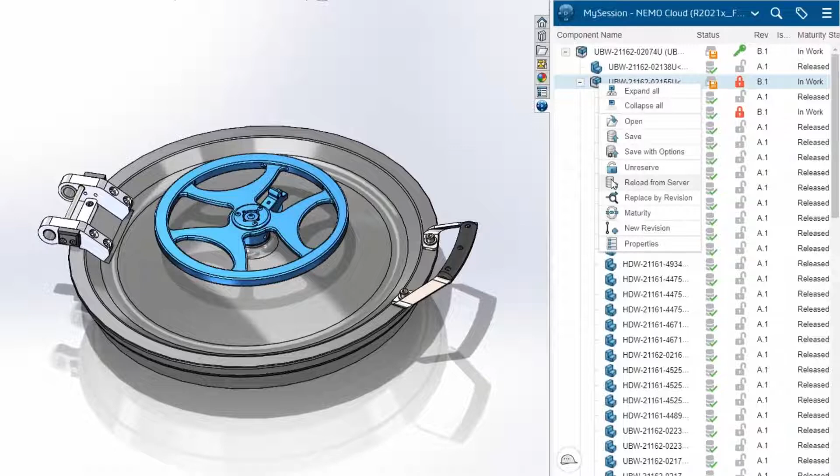We get a context or a chat from Debbie saying that update has been made. We need to update our session to reflect that. So what we can do is reload that from the cloud storage. And now we see the updated hand wheel in our session as well. So we can go ahead and open up the drawing to review to make sure that all of those changes have been properly implemented before releasing that data. And after the review has been made, we can just open up that maturity state workflow and set these to release as well for production.

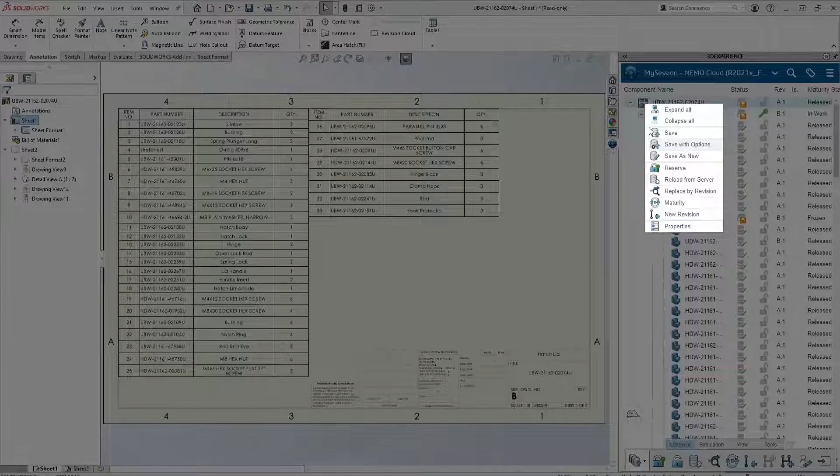We'll go ahead and wrap up our portion of the design by adding some linkage rod connectors. And we'll go ahead and open up the associated drawings, make those updates, and save all of those changes as well. In terms of non-SOLIDWORKS files, you can update those by uploading new versions that have been made locally. And once those have been updated, you can always go ahead and preview those updates to make sure that the right version has been saved up.

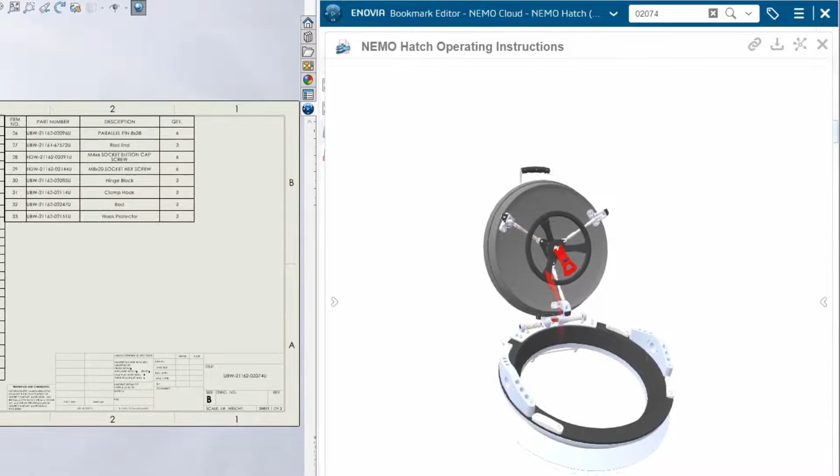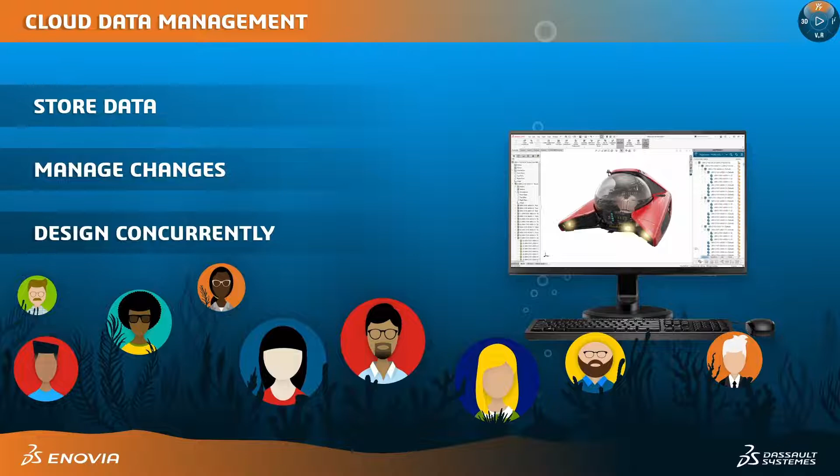So with this, we saw how we can store data, manage changes, and design concurrently. And this isn't just for SOLIDWORKS users. Everyone in an organization can benefit from proper data management practices, and this can go even further into change actions and more. So this is just the beginning of how you can manage your data with the ENOVIA tools on the 3DEXPERIENCE platform.

Alrighty, let's wrap up today by taking a look at simulation without limits. When it comes to simulation, there's a chance that you're going to need to test multiple different variations of your product. You're going to need to check the cycle and see the durability of your product, and ultimately check for material failure as well. There are a number of different physics that you can be simulating for. You've got fluid dynamics, physical product simulation, so on and so forth. So collecting all of this simulation data can be a really time-consuming task. If your tools are disconnected, that collection of data can be even more daunting.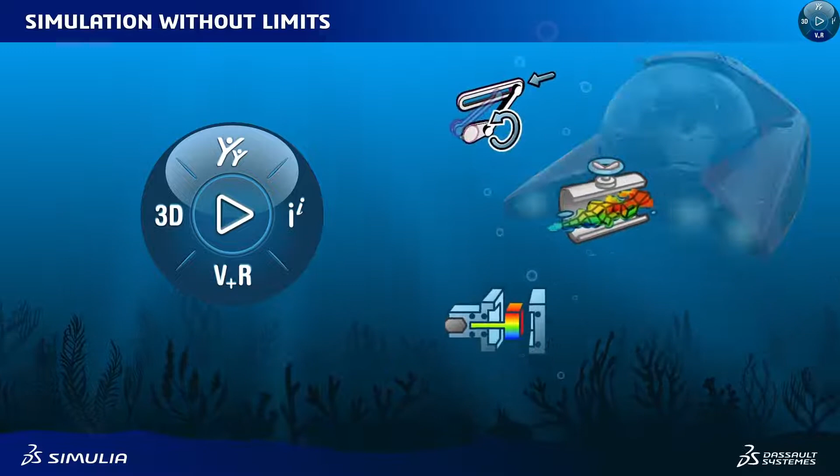But there is an option with the 3DEXPERIENCE solutions that will allow you to work directly with multiple physics, and you can test your physics, fluids, plastics, and more. Best of all, it connects directly with SOLIDWORKS, allowing you to design your data in SOLIDWORKS and run your simulations and keep all of that in context. So if you make updates in SOLIDWORKS, you can pull that right into your simulation without having to set everything up from scratch.

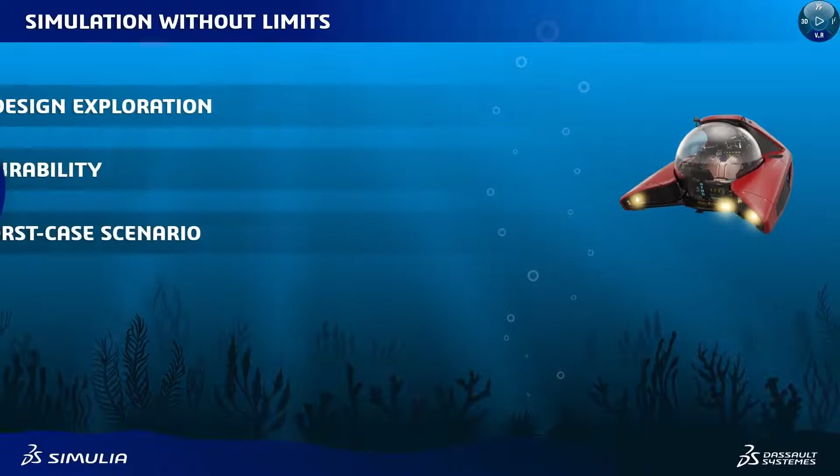So we'll follow along with Adam Analyst as he runs some simulations on the battery compartment as well as the skid for the Nemo submersible. We'll jump into some design exploration and how you can check out different variations of a design, check out how to check for the durability and life of a design, as well as taking a look into worst case scenario and material failure for a design.

So starting out with the design exploration, we're going to start by taking a look at the battery compartment, which has concerns as it goes deep underwater. The pressure on the outside of the compartment can cause failure potentially.

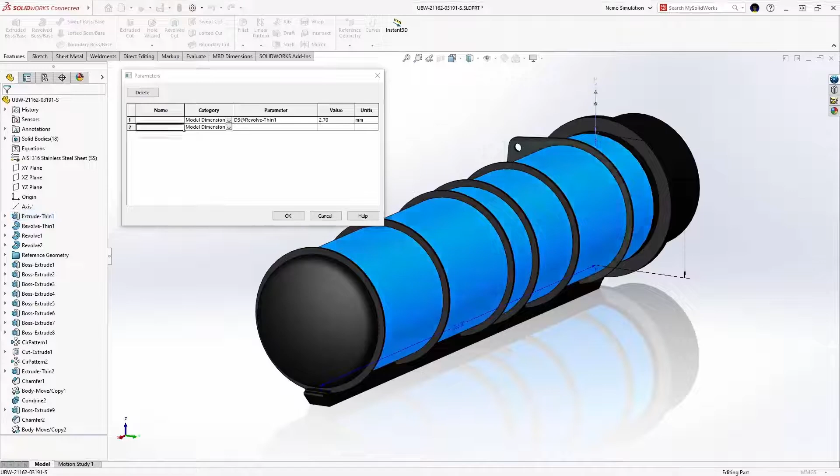So we want to test for that and make sure we have an appropriate design for that constraint. We'll choose the variables we think can be modified to allow for the desired outcomes. In our case, we want to check the thickness of the shell as well as the thickness of the stiffeners. As we add these as parameters, we can save this up to our cloud storage.

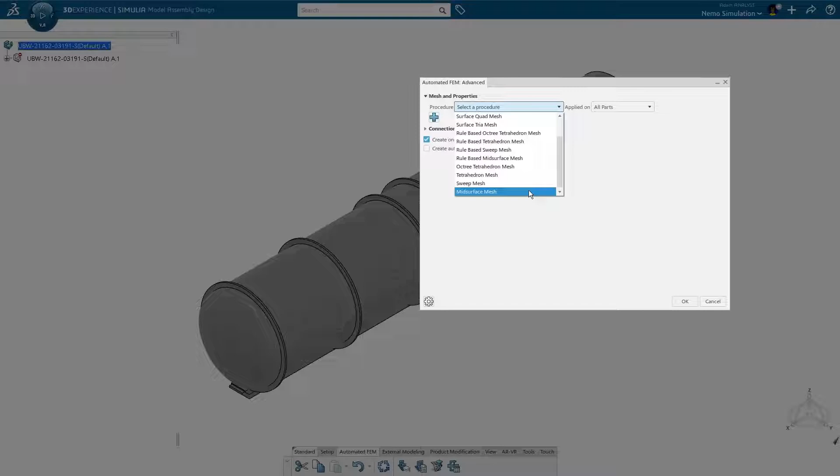Then we go ahead and open this directly into the simulation-based apps right from SOLIDWORKS. Once this opens up, first thing we want to do is create a mesh, and we can use a bit of automation here. We can choose a mid-surface mesh, and this will recognize all the thin components, create mid-surfaces on those thin components, and at the same time create the associated shell mesh bodies.

Now we are going to open up the mechanical scenario creation, and this is where you add your associated steps, your restraints, and all of your associated forces. In our case, we want to have the pressure on the outside of the shell pushing in, and this pressure is associated to the pressure at the desired depth.

Once you run this simulation, we get to see the results here right in your window, and we are able to animate the results as that load is applied. At first glance, we see that it is over-designed, so we're going to go ahead and explore some different alternatives.

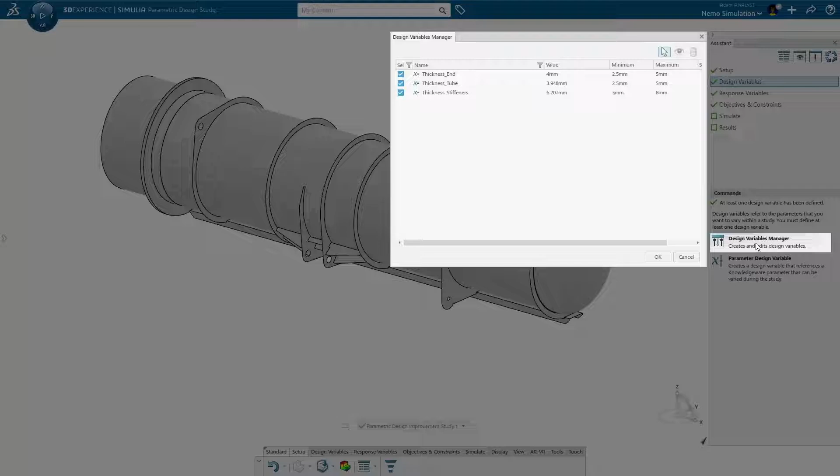With the parametric design study, you're able to apply different variables and set a goal target that you want it to achieve, and rapidly iterate designs and test different options.

So here we can see the multiple different iterations of this design that were tested, and we can take a look and zoom in on some of them and see the individual factors and results that came with them, and even filter out by the best versus feasible options.

In our case, we want to take the best option and make some downstream changes to it, so we're going to go ahead and generate an alternative for that design and make the changes to that alternative.

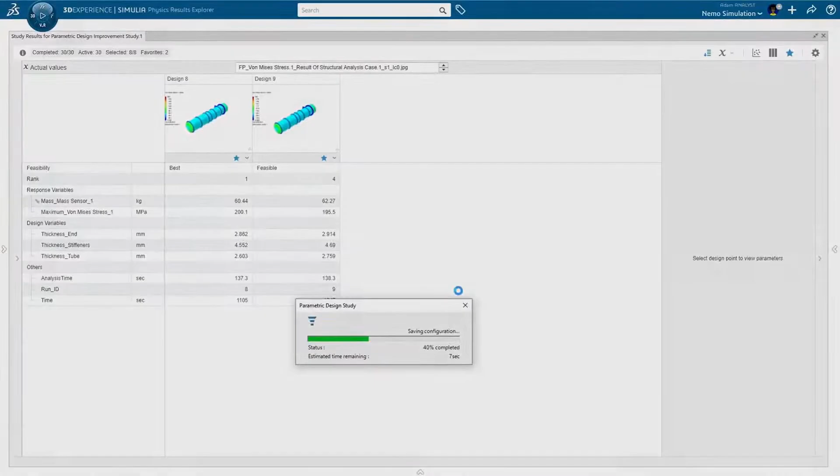Next up, we'll take a look at the durability aspect of the Nemo submersible. The battery compartment will be experiencing that pressure over and over again, so we want to check the life of that. And then we also want to simulate for the skid on the bottom of that compartment.

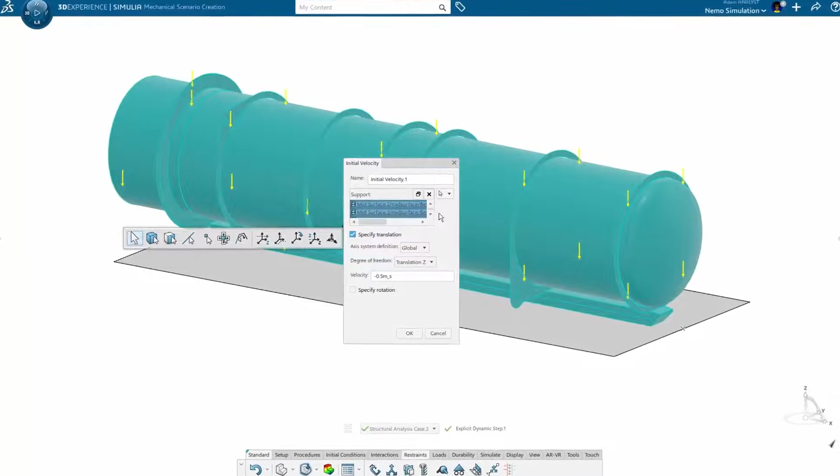So we're going to set up an explicit dynamic step in which the impact is complex, so we have that complex solver to take care of it as it's being put in storage. We'll go ahead and add an initial velocity, and then add gravity so we can simulate that falling and hitting that surface below it.

We can set up general contact, so we don't even have to apply individual contacts. The solver will automatically take care of anything that comes in contact with another object.

Once we have that all set up, we can run that solve as well. In this case, we want to set up a cloud run, and this allows you to send to a cloud-based solver and use up to 144 cores, greatly reducing your solve times.

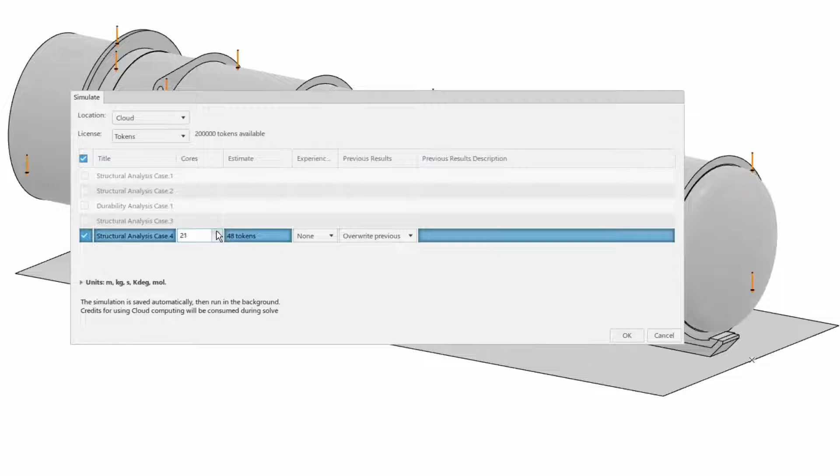So here we can see those results, and it's within expected ranges of that material, but we do still want to test for the durability, because this can happen over and over again, and over time it could wear out and fail. So we can set up a fatigue loading case.

With that, we can choose whether we want to include just the last increment or all increments for the case. In the case of the explicit dynamics, we'll include all increments because there are a lot of small contacts and fluctuations as that load case was simulated.

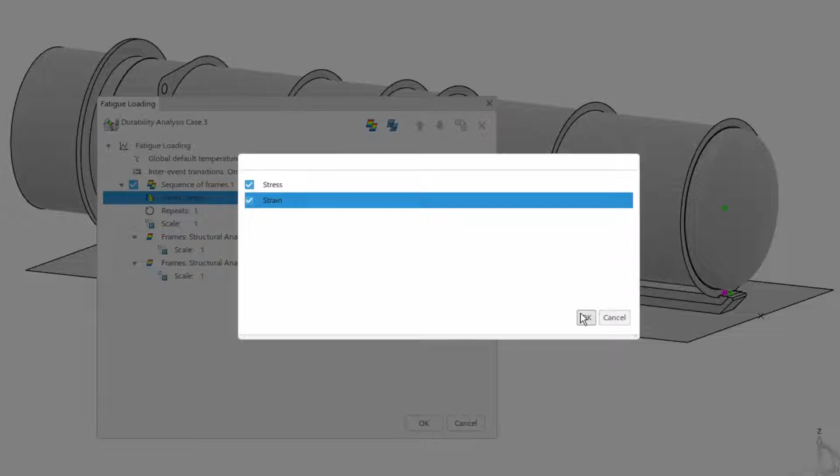We can also choose whether to include just stress, just strain, or both. In this case, we'll include both of them to improve the accuracy for both the high and low cycle fatigue.

In our case, we're only worried about one event happening at a time. The skid plate will only be in contact with any surfaces as it's being put in storage, and the pressure is only going to be applied when the submersible is deep underwater. So we're not worried about inter-event transitions, but you do have the availability to test for the fatigue of multiple events happening at the same time.

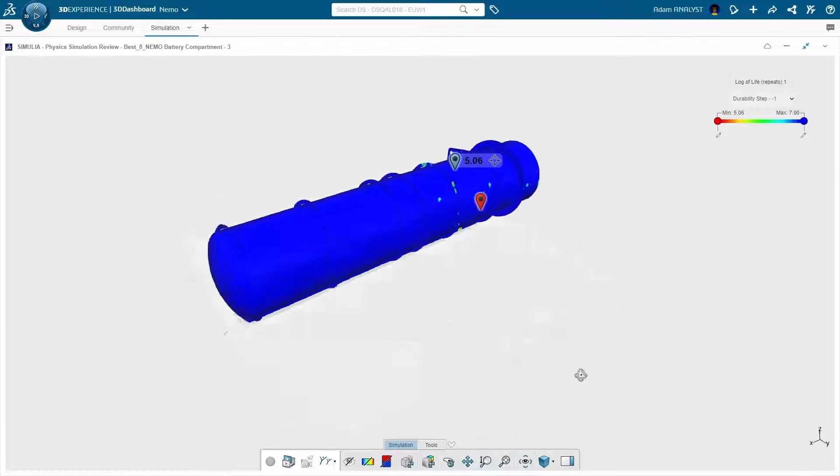So we can wrap up by defining a surface finish, then running the simulation and checking out the results. We're able to see the log of life here, and even share this in a lightweight view on the 3DEXPERIENCE platform. This is accessible within any browser, so you can share this with your team, and they don't even need the simulation software. It's a great way to reduce report times, sharing directly with data results.

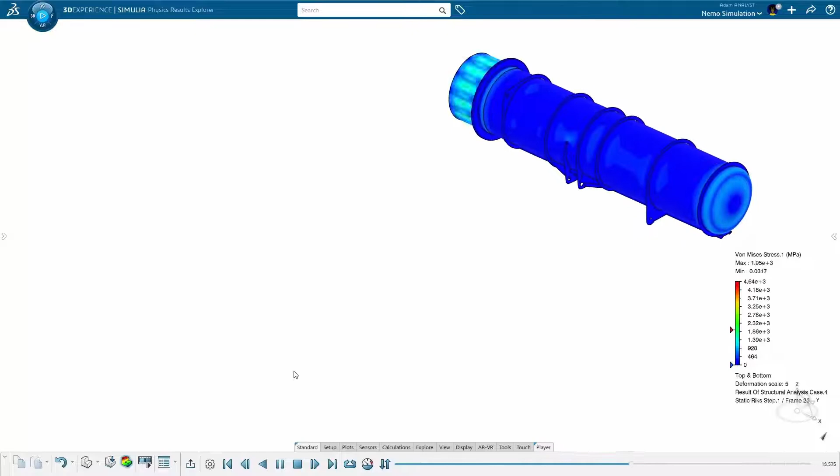So we'll wrap up simulation without limits by taking a look at the worst case scenario. With the worst case scenario, we can actually take the case we already set up and duplicate that, so we don't have to set up everything from scratch. Then we can go ahead and add a Riks buckling step, which is great for any unstable and non-linear behavior in materials for failure. Now we can get a good visualization in 3D of where that failure can be expected. We can also create an XY plot to better visualize which areas of this compartment for the batteries will fail first.

This can also be shared on the 3DEXPERIENCE platform, meaning anybody with access to the platform and your data can then access these results without having the simulation software themselves. And even if it's yourself reviewing this, you now have it on the go wherever you go, even with a phone—you can jump on and take a look at these results.

So with simulation, we can check for multiple different iterations of a product rapidly. We can check how long that product is expected to last and where it's expected to fail if it does fail.

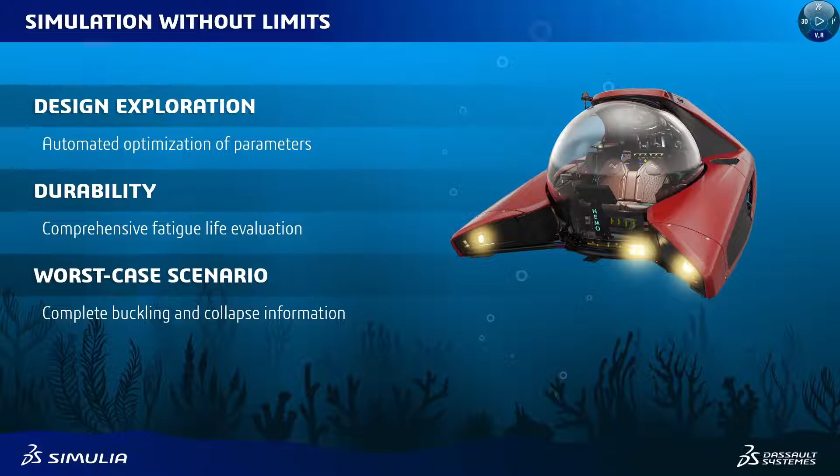So that was a look at all of the newer capabilities available with the 3DEXPERIENCE Works portfolio and how those can work really powerfully together with SOLIDWORKS, bringing you possibilities that weren't available before.